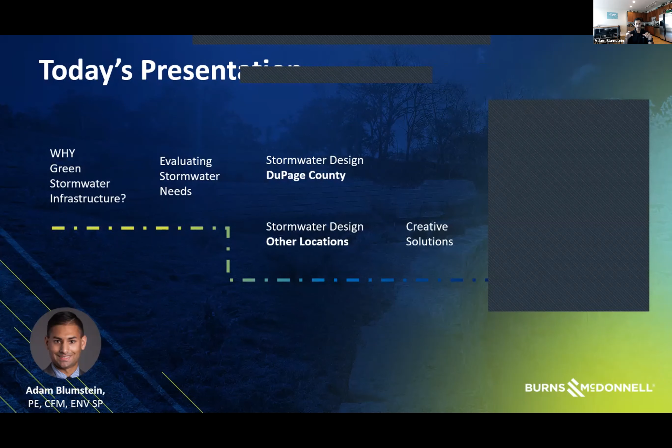So today's presentation includes a little bit of discussion on why green infrastructure is important, and moving along to how do we evaluate some of our stormwater needs and find better ways to evaluate that from what we've been doing in the past. Moving forward a little bit to talking about stormwater design in DuPage County. We don't want to hit too much because we know most of you guys probably know DuPage County better than we do. Then move forward towards stormwater design and talk about some other locations that we've worked on across the country and some of our experience working in different areas and kind of how that compares to DuPage County and what other places are doing.

And then talk a little bit about some creative solutions that we've implemented on different projects and our component-based approach to implement specific stormwater components on these different projects and how they might fit in, and then wrap up and summarize our theme, raising the bar. And we're going to bring that up multiple times. You'll hear us talk about it and reconnect different components of stormwater management and really how we can do better.

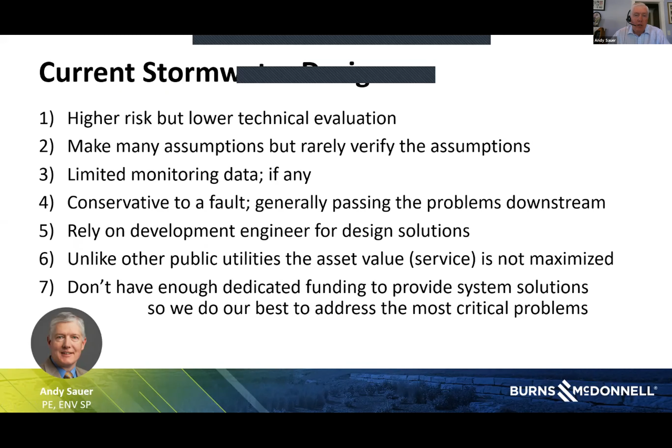And then as we redevelop or develop, a lot of our solutions are done at the development engineer level, and I would argue that sometimes those are smaller projects, but we don't understand the overall impact that those smaller developments have on the overall system. And so sometimes I refer to that as a death by 10,000 cuts. We continue to improve our system upstream with redevelopment and development. We don't understand how that impacts downstream, and so we see problems.

And then unlike other public infrastructure, I would argue that we don't often maximize the current infrastructure we have and get full value out of it. And are there ways that we can do that better in the future? And I would argue there are.

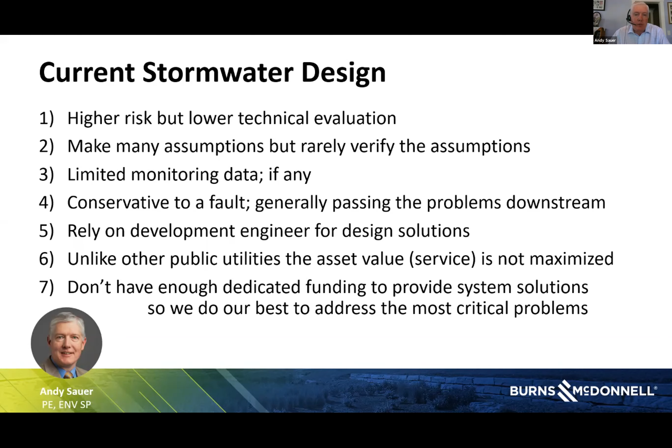And then finally, we all live in this boat, and even the EPA and the federal government are looking at ways that we can get more dedicated funding, because stormwater, as we all know, unfortunately is kind of the last one to the table. And we don't have enough funding to address the issues that we're going to talk about here today. So that's, I know, a big problem. So if we move on, Adam.

So why should we care? Well, we all care because we're on this webinar, obviously, but our number one thing we're doing with stormwater improvements is we're trying to mitigate flooding, right? And so I've looked around the country and looked at different things, and we do projects, and you look back in the future, and we still have all these flooding problems in urban areas.

There's always a storm that we can't manage, and we see this often, and I know every community from DuPage County to Kansas City has these issues. So when we think about this, do we really understand, when we do improvements, what the issues are downstream, and are we truly mitigating flooding as we look throughout the system? So next slide.

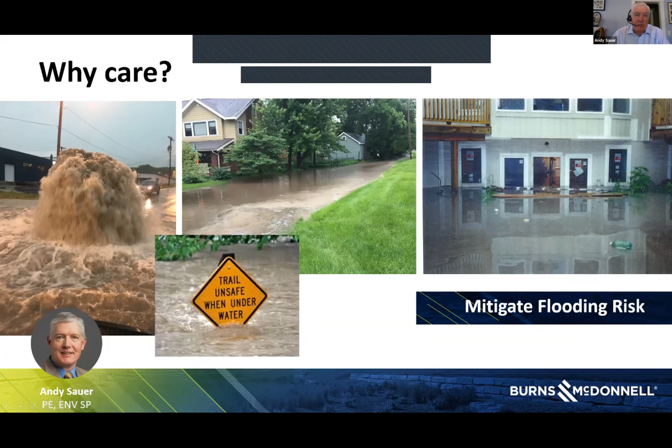I'm going to go through these pictures fairly quickly so we can stay on time. And then this is my biggest one I've looked a lot at in the last few years: when we're doing system improvements upstream, do we think about, especially if we're discharging to natural streams, what are the impacts of that more efficient hydraulic collection system? This picture on the left was something that happened within about 18 months after this large RCP went in, and how devastating that was to the downstream stream.

We see infrastructure such as sanitary sewer systems that were in the bank of a stream now are in the center of the stream, and we see larger infrastructure on the right that now is being undermined by a stream widening. So all these things are things that we need to think about. How can we do better designs to not have this adverse impact downstream?

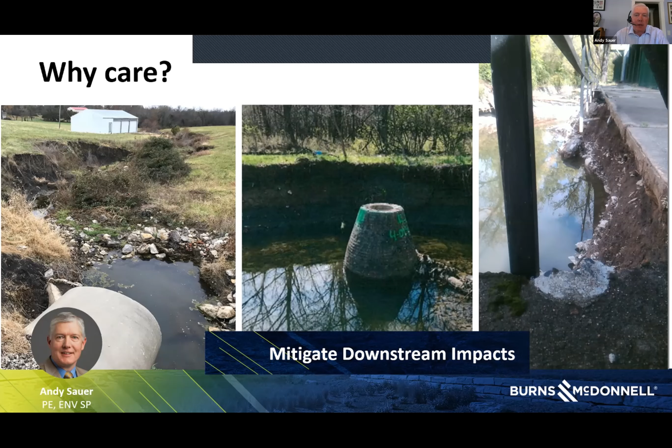We also see this in our road crossings with large culverts being undermined, or wing walls for a recently completed project all of a sudden falling into the stream. Well, that obviously costs us, from cities or municipalities, significant dollars to repair. And we just mentioned that we don't have enough dollars, so can we think about these designs and make them more resilient, so that we're not having these issues right after we've constructed them? So those are all things to think about.

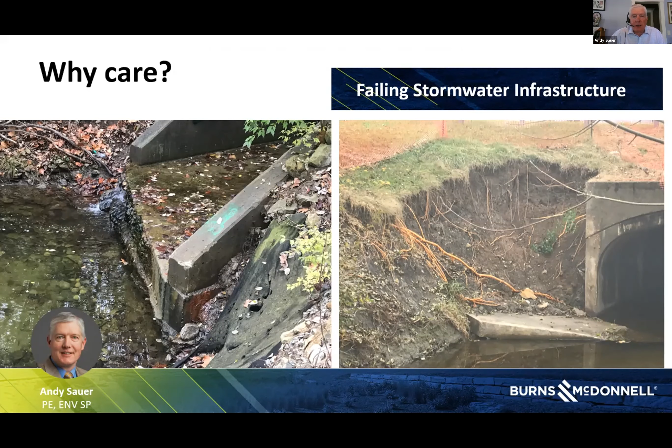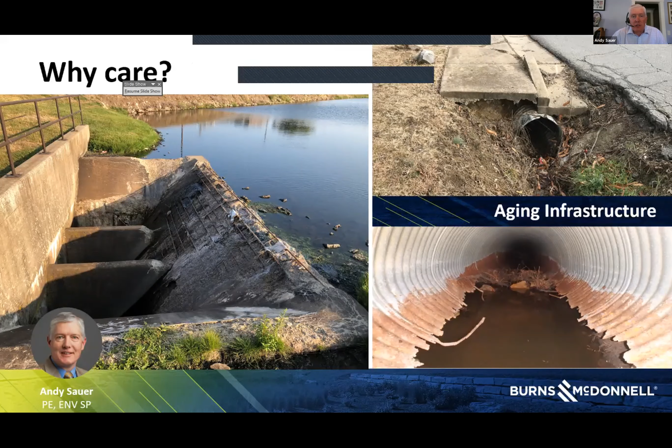And then of course we have the aging infrastructure. The aging infrastructure is a huge problem, obviously, but it's also an opportunity when we're improving these areas. Can we look at these systems a little bit differently, and can we do projects differently so that we're not replacing the aging infrastructure all the time with just larger pipes? Can we manage the stormwater a little bit differently? So can we do better? We have a couple examples we're going to talk about as we move through this presentation.

A lot of times we say, well, we're adding inlets to get more capacity, quote unquote. But what I find a lot of times, we don't look at the actual enclosed system capacity. We just add inlets, and the case on the left, that was done several years ago, and there was no improvement in the street flooding there. What it ended up being is just impacting the pavement more than helping with anything.

And the item on the right was a project that Maddie's going to talk about a little bit more, where this city had some flooding in this public alleyway, and so they went in here and just added this grate inlet. The real problem was they had over 4.5 acres of directly connected impervious area, and the downstream system was an old, antiquated system with no capacity. Adding the grate inlet actually did nothing. They didn't understand the problem, so they weren't able to solve the problem.

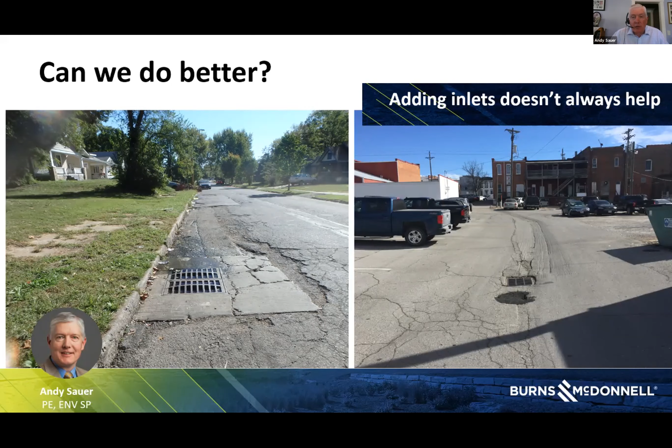And so Maddie will show an example of how we did a little bit different design to help address the problem, rather than just adding an inlet. We looked at what the problem was and then designed a solution to solve the problem.

And these are some of my favorite slides. We do stormwater, but then we try to make sure the stormwater doesn't get in contact with vegetation. I love this. We have a lot of detention basins that have concrete flumes at the bottom of them, so the most frequent water doesn't get to the vegetation. I call them flow in, flow out detention facilities. So I argue, what's the value we're really getting out of these systems? We're mowing them, but we're not doing anything else with them because very little water gets outside of the flume a lot of times.

We do curb setback inlets, and then we also spend money on vegetation and trees right behind the curb inlet, but once again, we don't connect any of those. In this picture on the upper right, we're using an alligator bag to irrigate the tree, trying to keep everything alive, and meanwhile, we have a stormwater inlet, and we're not connecting anything to the vegetation from a stormwater standpoint.

And then my favorite picture is the tree completely surrounded by curbs, and how sustainable is that, right? We're spending money on trees. Many cities and counties have landscaping tree ordinances, and then we're putting them in a concrete prison and thinking, well, I hope that tree lives.

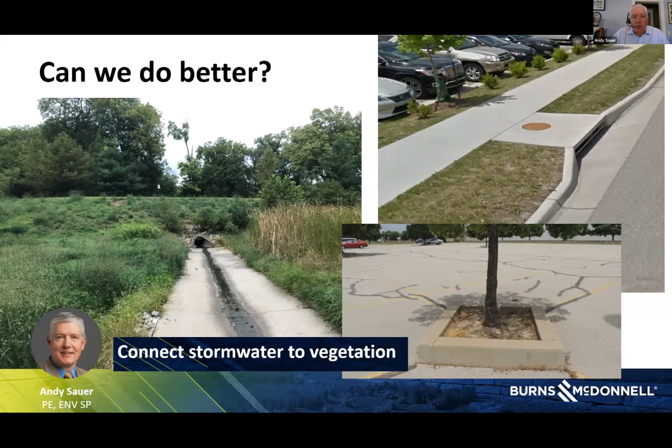I would hate to be that tree. You get what, 18 inches of space to try to live. So these are all things I think, can we do better? And I would argue, yes, we can. And so how does that look?

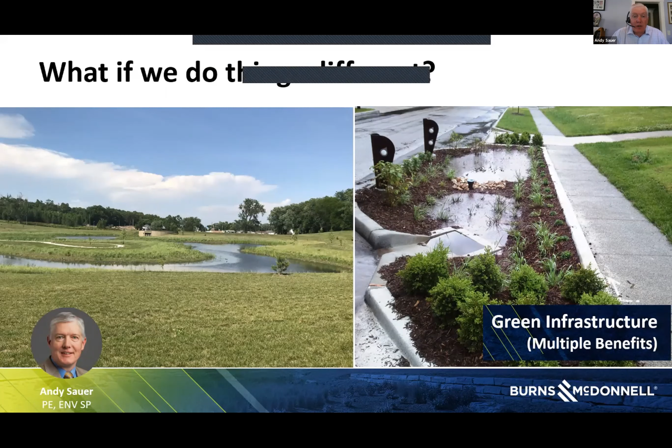Well, we've been doing a lot more with various different cities, looking at ways where we're looking at stormwater as more of a resource, and how can we design and implement projects from as large as the one you see on the left to as small as the one on the right. But we're using that stormwater to maintain a vegetated system that is capturing, controlling, and I think controlling is key, and then conveying stormwater. So we're not just capturing and conveying, we're using green infrastructure or other places to use that water, control it before we're immediately conveying it downstream.

Other things we've been doing is optimizing existing systems or optimizing stormwater function with real-time controls, where once again, we're able to, in an adaptive situation with real-time controls, manage stormwater before and after a rainfall event by using the National Weather Service forecasting, in this case through a company called OptiRTC, where they're able to predict the probability of rain, and then we can lower or open a valve to increase the storage volume in real time, so that we can optimize that facility and get a higher benefit from that stormwater retention.

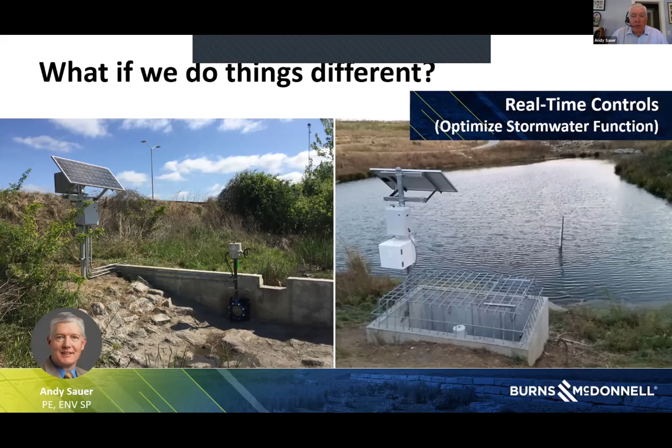And then, of course, in many urban areas, the pervious pavers are a great application where we have large parking lots, where we can do what I refer to a lot of times as more continuous collection. So instead of collecting stormwater at a curb inlet or grate inlet, we're now using this continuous collection idea with pervious pavements, and then storing it temporarily underground in either aggregate storage or plastic crate storage to get that control again before we're then discharging it downstream.

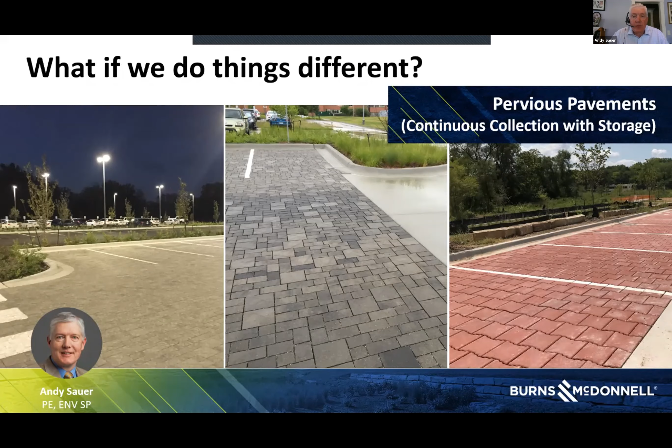And then using more open systems, once again, in open swales, vegetated swales, where we can collect, store, and convey. So all these options we're showing just start to look at what are the multiple benefits that we can get with stormwater, and the solutions start to look, of course, a lot different.

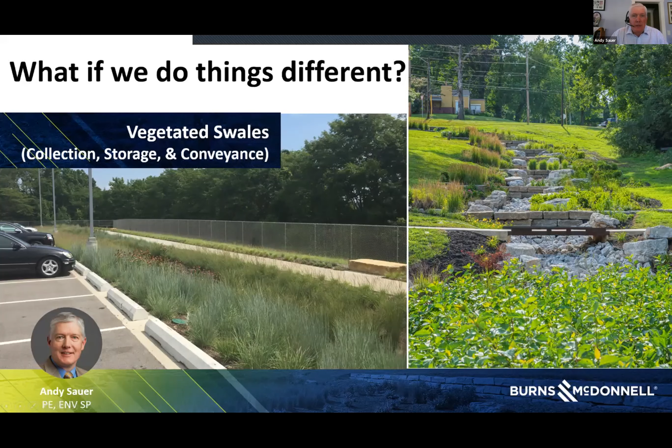So with that, my final introductory slide here is that we'd like to really understand and solve the problems, and then provide that multiple benefit. We want to maximize the limited stormwater dollars we have and to increase the benefit. We want to increase the level of evaluation to reduce all the risk, not just maybe the upstream risk. I think we all have a goal to optimize our current assets, and smart technologies, continuous modeling, optimizing those systems is a way to do that.

And then considering the total cost of stormwater management, and how that impacts downstream assets. So if we're solving a problem upstream and just passing it downstream, there could be significant cost in that solution that we're not necessarily considering. And then finally, I've done a lot of work in the last few years on updating city and county design standards, because if you don't understand the standard you're trying to implement, can you actually even afford to meet the standard you're trying to meet?

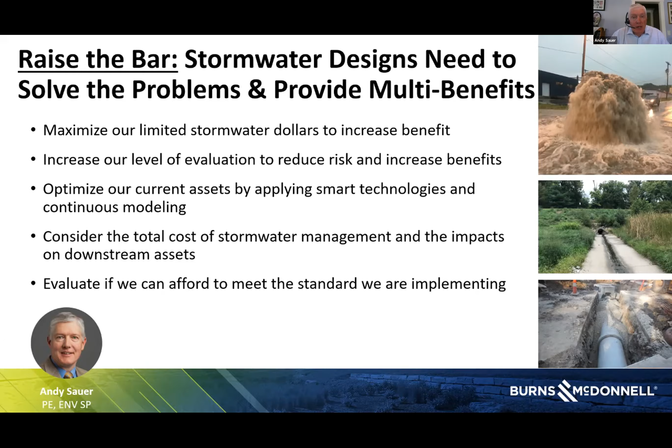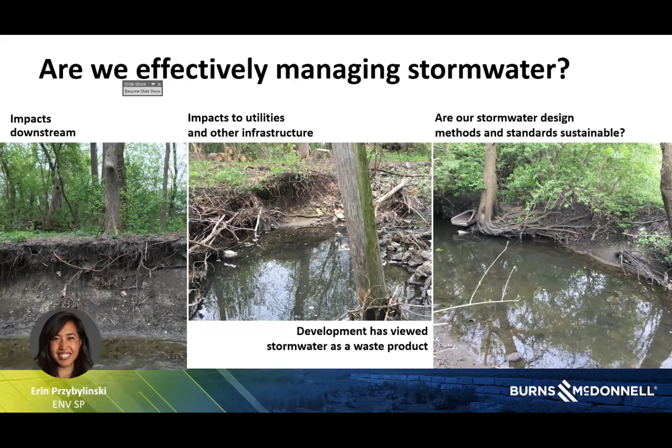Guessing it wasn't originally designed and constructed that way, but without proper management, that water is eventually going to get to where it wants to go, potentially impacting nearby utilities and infrastructure. And finally, can we shift our mindset to view stormwater more as a resource rather than a waste? And the first step to capturing that resource is really asking the question, are our stormwater design methods and standards setting us up for a sustainable design?

So an example of that is how we typically evaluate our designs. And a commonly used method is looking at these discrete events, so just how a single individual event would impact your design. We ask ourselves, can it withstand the 100-year, 24-hour storm? Yes, great, sign and seal it. But we don't really consider how having several smaller events occurring within a short period of time, which is not an uncommon occurrence in this region, how that could impact how our system performs.

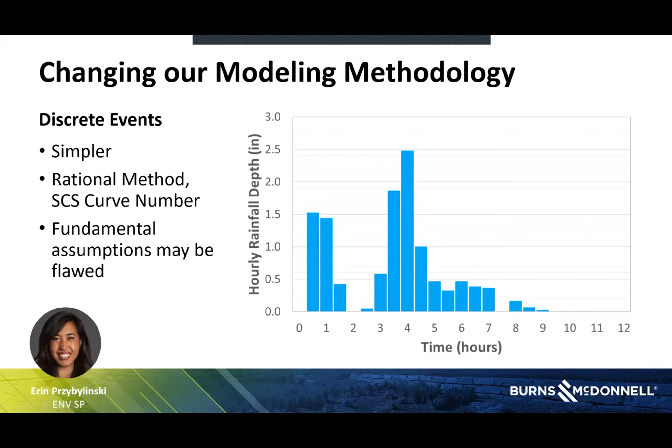On top of that, the rational method is very dependent on certain parameters that can kind of be manipulated to sometimes get the answers you want. And like Andy mentioned earlier, often the modeler needs to make assumptions to fill in those parameters in the first place. And it's always possible that those assumptions could be inaccurate. So a more robust methodology that we can use is continuous simulation. So that's the next slide.

Setting up a series of rainfall events to run through your design to get a more comprehensive perspective of how your system is going to perform over the weeks, the months, the years. You can even consider using historically recorded data from your region if it's available, which would give you even better tailored results. But really getting away from that peak flow analysis can help us better understand the risk of system failure.

Even if we continuously evaluate system performance throughout just the duration of a single storm, we might see that, yeah, it's at capacity during the 10-year, but maybe only for 4 minutes. Is this something we're willing to accept? And you can make a more sophisticated, multifaceted decision rather than a binary, does it cap out or does it not approach, because risk is really more complex than just yes or no. So maybe we should consider shifting away from that lower technical evaluation that Andy mentioned earlier with that higher risk, and more towards higher technical evaluation with a more complex understanding of those risks.

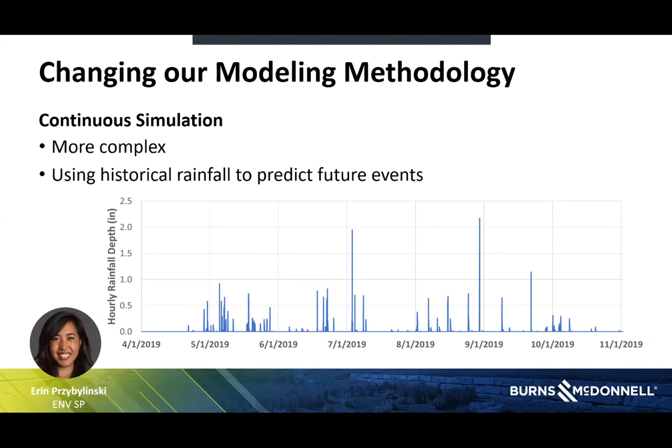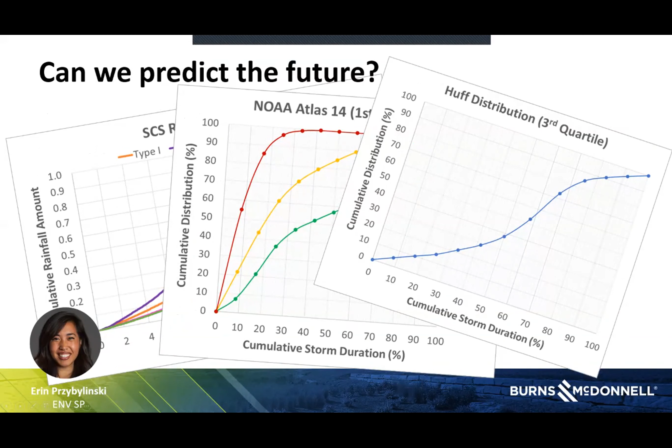And risk really lives in the future tense, right? And we have dozens and dozens of rainfall distributions that have been developed by different agencies. This is on the next slide. And these have been developed using years and years of data that's been collected to try and predict the future rainfall events. But I guess the question is, is basing our designs on these past storms and past data going to set us up for success in the future? For example, did you predict this storm event back in May? And I'll hand it off to Adam to tell us a little bit more about this photo.

But in this particular instance, we had heavy rains in the region, even tornadoes in some areas. There was an earlier rain midweek, I think around the 14th and the 15th of May, which dropped about an inch and a half of rain in the Naperville area. And then another 2 inches of rain fell over the weekend, I think on that Sunday the 17th. In some areas of Chicago it was up to 3.5 inches of rain. So those back-to-back storms, are we considering that?

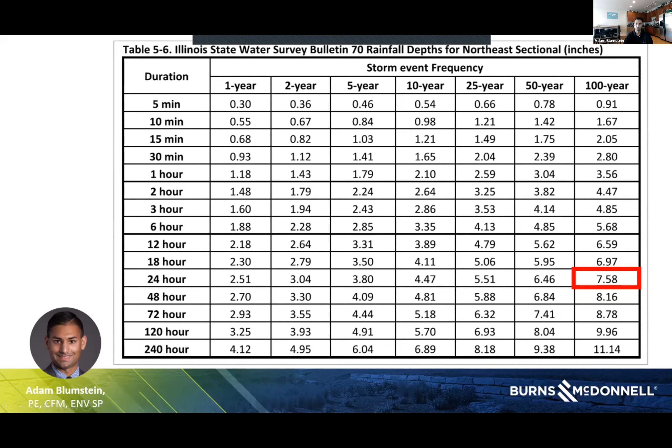So going along with rainfall, I think all of you are familiar with Bulletin 70, and DuPage County now using Bulletin 70, looking at how that's changed over the years. Previous to 2019, when the Bulletin 70 update occurred to the rainfall depths, I've highlighted here about 7.5 inches of rain for the 100-year 24-hour, which is commonly what we use to design our detention basins and major stormwater facilities.

Then you look at what's happening after the update that was made in 2019, and what the majority of communities are now using going forward is almost an inch more of rain for the 100-year 24-hour event. So the climate scientists looked at the past historical rainfall data in the region and extrapolated going forward: what are we going to see? So climate change is something that we all need to think about and design for, and the State Water Survey is trying to take that into account, and I know a lot of communities are doing that as well.

Again, going back to the example of back-to-back events, the one downfall of looking at maybe just this 100-year 24-hour event: are we considering how events back to back could affect our designs? And also even the smaller events, could we be potentially over designing for most of the events, or not even controlling the right amount of water, and maybe for these smaller events we're just letting out too much water as opposed to looking at these larger events.

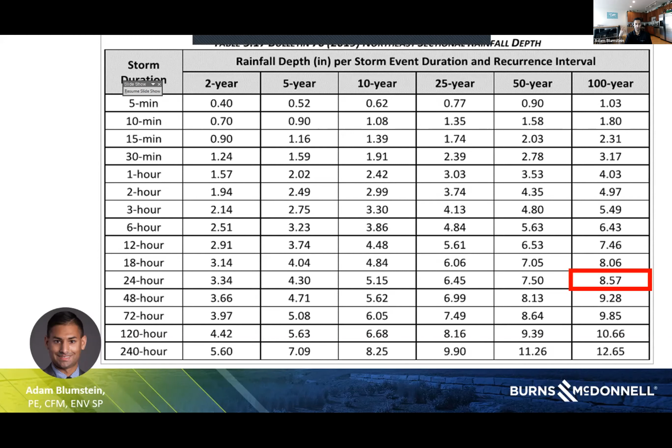So these are things to think about as we're designing, and obviously we have to consider the standards, but as an engineer, you always need to, in the back of your mind, be thinking, what I'm doing, does it make sense, and not just blindly follow.

So moving on, I'm going to touch on this real briefly because obviously the group is familiar with DuPage County, so just touch a little bit on some of the topics related to what we're going to cover further in as we compare it to other communities. So you can see how things may differ in the Northeast Illinois region versus other parts of the country.

If you look at the DuPage County Stormwater Ordinance, two things we wanted to highlight, and there's a lot of areas that we could talk about, but as we look at best management practices, the requirement is if there's 2,500 square feet net new impervious, you have to design for post-construction BMP using a 1.25 inch rainfall event. You could find that in the ordinance. And that's looking at volume and pollution control, and the main component is to encourage infiltration, which is a great thing, and that's one of the ways we talk about raising the bar on stormwater.

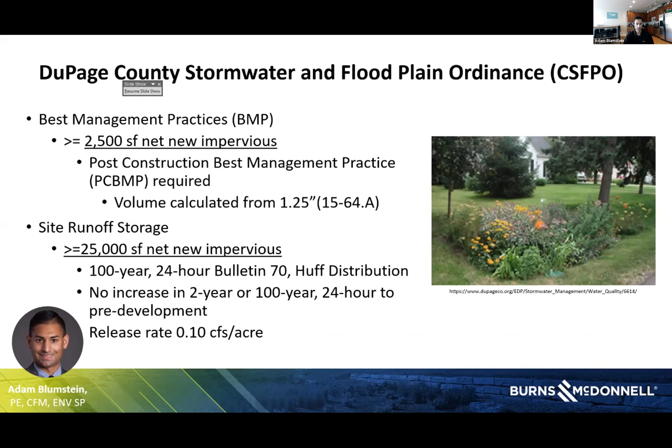Also site runoff storage is another area we look at. We talked a little bit about the 100-year 24-hour, and a little bit about release rates. So again, the ordinance does mention not increasing for the 2-year event as well compared to pre-development, which is a good thing. So again, it's looking at not just one single event, looking at multiple events, and also how smaller events, which could potentially be affecting our system more frequently than these larger events, affect our infrastructure.

As we move on to BMPs, DuPage County has a pretty developed BMP manual. You can reference it through the Stormwater website. DuPage County breaks down their BMPs into 3 categories. Stormwater treatment, which is really looking at quantity and quality, so infiltration and vegetated swales are a few examples of those types of BMPs. Sediment control, so preventing that sediment from getting into the water bodies. That could be your typical silt fence, sediment traps, those types of things.

And then pollution prevention, which is more of a maintenance and operations approach, looking at how you can prevent by doing street sweeping, spill prevention control, and other measures to prevent longer term pollution into our waterways. And really it comes down to, if you look at this table, which is also taken from that BMP manual, really minimizing our impervious surface. So raising the bar, by implementing more infiltration and green type solutions, we can prevent a lot of the impact that we would potentially have on our waterways.

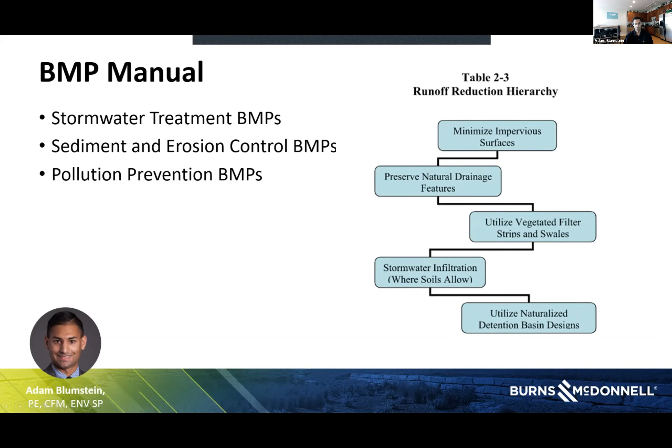So now I'm going to pass it to Maddie. She's going to talk a little bit more about what some other communities are doing that we've worked with. Yeah, so Adam gave some great examples locally there. I'm coming at you with some ideas from what other communities are doing.

Also a perk of, I guess, COVID is that we can see what other communities are doing much easier via these online webinars. A lot of the examples I'm going to give today are more of that central Midwest, that Nebraska, Missouri, Kansas kind of region. And Andy and I are both from our Kansas City office, so we have a lot of KC Metro references here to share with you guys today.

One of those being that the KC Metro area has had and currently has some regional stormwater standards. So Adam presented some of the DuPage County requirements for BMPs. We also have a BMP manual here in the Metro, where we're looking at more of that 1.37 inch range. When we're talking about some of our other local communities that also need to meet CSO compliance, that water quality storm is very similar to some of the target combined sewer compliance storms that these communities are looking at as well.

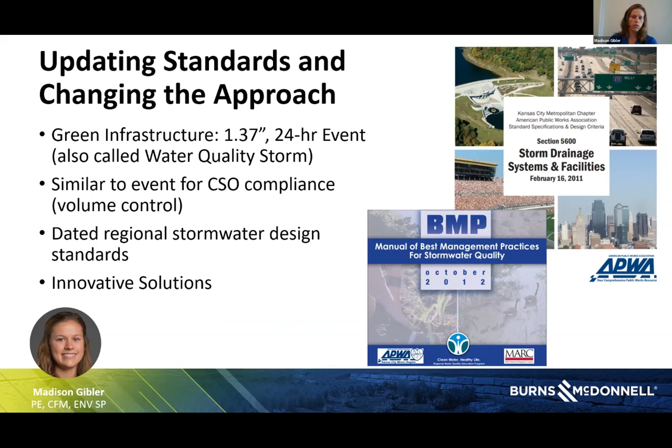However, unlike the DuPage County area and the Chicago Metro, you guys have updated your requirements here pretty recently. Some of the regional criteria that we have in the KC Metro area is getting pretty dated, kind of in the 2011-2012 range. And in those standards, some of the requirements preclude some of those more innovative, sustainable solutions. So we're going to talk through how some of the communities are branching away from the norm and trying to provide a more comprehensive benefit to their area, to their community.

So the first approach here is more of a watershed approach, where this community is looking at their jurisdiction on a smaller watershed basis. So this example here is a watershed that's highly developed and is pretty primed for redevelopment in the next 10 to 20 years.

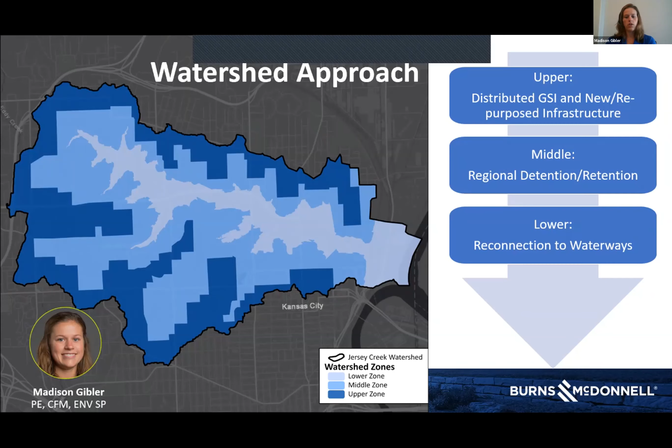So looking at breaking this watershed down into different topographic regions, an upper region, a middle region, and a lower region, each with varying stormwater management objectives, where they're looking more to use distributed green infrastructure to collect and store stormwater where it falls in the upper zone, trying to identify some more regional detention or retention opportunities in the middle zone. And then as they get to the lower zone there's a natural, well, it's not natural anymore, but a stream or a creek that runs through the center of this watershed, and looking to reconnect the system to that stream.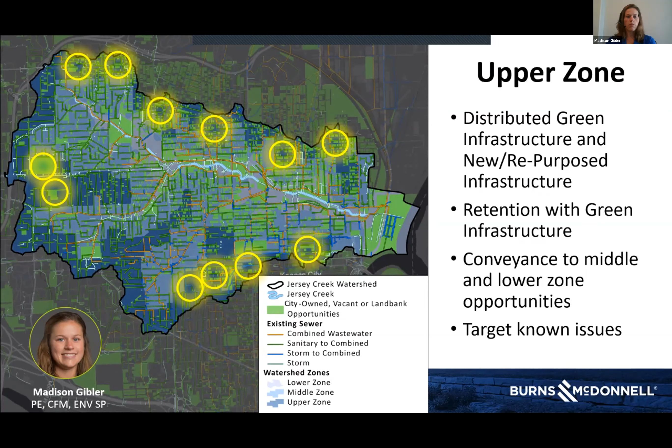So breaking it down by zone, the first is our upper zone here. So this is kind of those first couple of blocks. I mentioned this is an area primed for looking to collect stormwater, pretty much where it falls or in the first few segments of that minor collection system. By using green infrastructure, you not only get a detention-based benefit for those smaller events, you also get some retention. So we're removing some of the stormwater before the system and helping those downstream properties see less runoff. Also in this area is where you start to build out the connections to your middle zone and an opportunity to target some of those known drainage issues.

In the middle zone here, this is where stormwater is starting to aggregate. So you're getting 10 to 20 to 30 acres of drainage area. This is a great opportunity to identify some of those more regional facilities. Oftentimes there are opportunities to piggyback on different pocket parks or even larger park spaces where you can have a stormwater benefit and also be used as a public amenity. These can be designed to create those connections from your upper community before you get down into the lower zone. So they act as more control points to help protect those larger event drainage susceptible community members downstream.

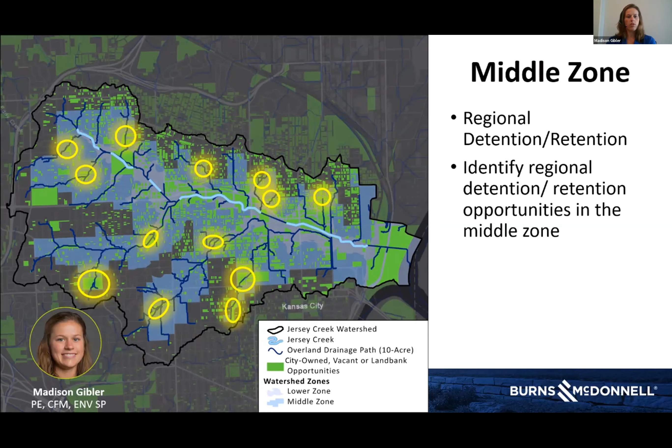And lastly, in the lower zone, this is again where we're starting to look at reconnecting to our existing waterways. We need to look at maintaining some more of those overland drainage paths. It's at this point in the system where these properties are more susceptible to more widespread or larger flooding issues. Now we're talking about potentially hundreds of acres of drainage area where, when the system's at capacity for a larger event, the water is going to go here anyway. So how can we get it down to the creek or the stream or that receiving water body without harming our neighbors?

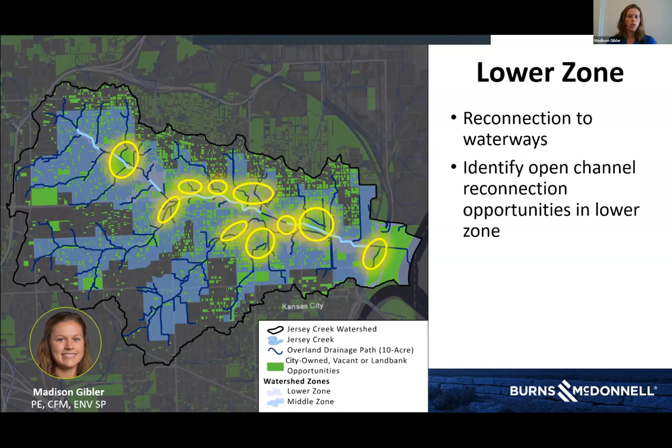So this example here kind of lays all three pieces together. This is looking at a sub-basin within that watershed example I presented previously. So up in the upper part of the watershed, looking at a more minor stormwater collection system to bring water to some of those smaller green infrastructure facilities, which are then upstream of a regional detention opportunity, capitalizing on an existing park space to enhance a wet detention area. That wet detention facility then acts as a control point before discharging stormwater to the lower system.

This sub-basin example has a lot of drainage issues in that lower portion there that's circled in yellow. So this area I mentioned is prime for redevelopment. This area here along that overland drainage path has a lot of parcel vacancies that happen to coincide with the surface stormwater conveyance. So by preserving and reconnecting those overland drainage paths to the receiving stream, this community has an opportunity to create a community amenity, whether it be a trail system, but also to protect those new development sites and that redevelopment so that the future developers and community members and property owners don't repeat the same issues that happened 20, 30, 40 years ago, why those people left that area.

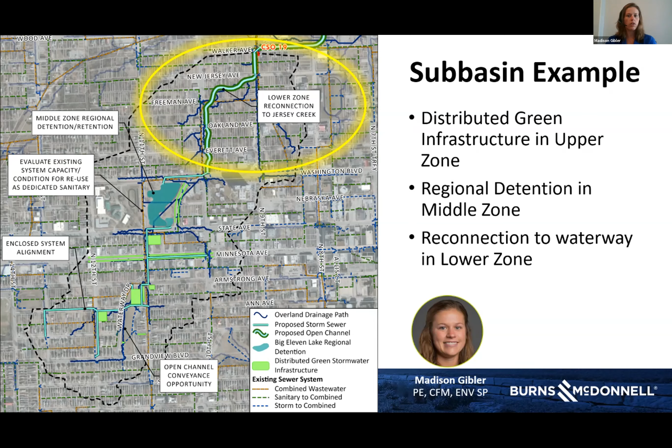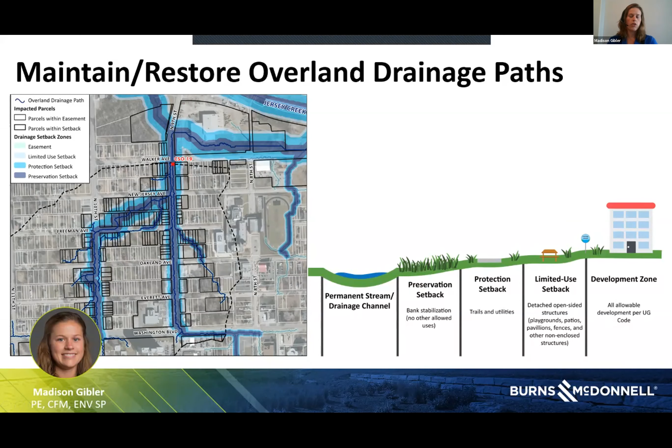This slide further emphasizes that importance of preserving those overland drainage paths. So that area circled in yellow on the slide before, this is a zoomed in view of that, along with breaking down this idea of preserving or maintaining overland drainage paths, similar to a stream buffer policy, I guess you could say, but more from the perspective of protecting those property owners so that we're not allowing people to put their homes, their businesses, their decks in the way of where stormwater is going to go when the system is exceeded, right? There's always going to be some event where we're not able to mitigate that flooding risk. And so to layer on that protection, we need to look at preserving those overland drainage paths for conveyance when that system is exceeded.

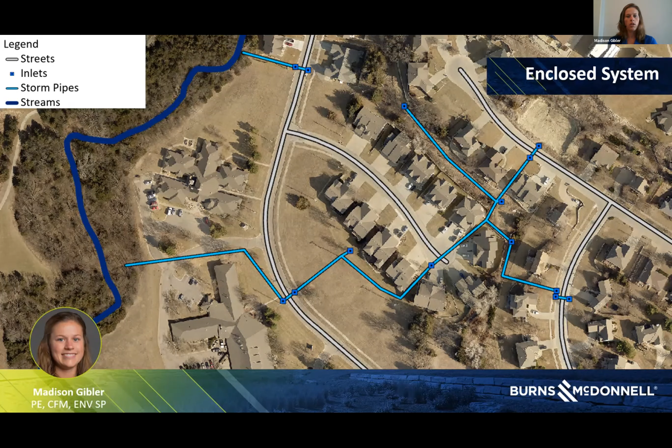So here's an example in another, this is a smaller community more in central Kansas. So instead of looking at redevelopment, this is a new development example. These homes were built circa 2014, 2015. The dark blue line on the left side of your screen is a natural channel system. It's an open channel, it's a stream. And you can see this neighborhood here to the right has a stormwater collection system, which then discharges to that stream.

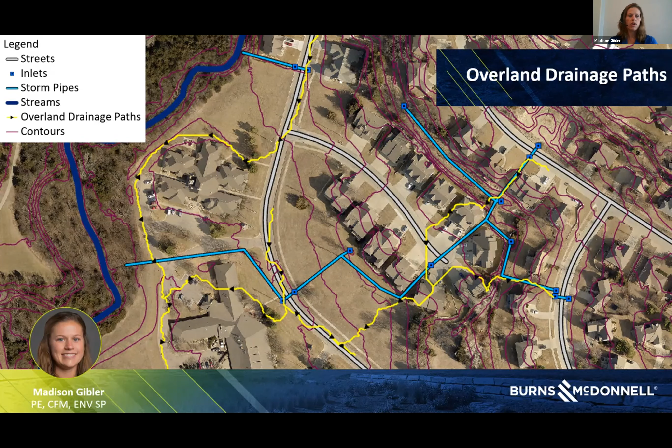From here, we overlay on the contours and derive where the overland drainage paths are going to be. So when that stormwater system is at capacity, it can no longer take any more. This is where stormwater is going to go. It's going to follow those yellow lines. So you can see that when that system capacity is exceeded, these are the homes that are more susceptible. So you've got the overland drainage path that's running through a couple of houses there. These are the homeowners that are more susceptible to those drainage issues.

And as you get closer to the stream there, that's a retirement facility, so an even higher risk of people having those drainage issues. So by understanding where stormwater flows when, not if, that enclosed system capacity is exceeded, that's how we can raise the bar on our stormwater design. We can plan our development accordingly to protect our people and our property.

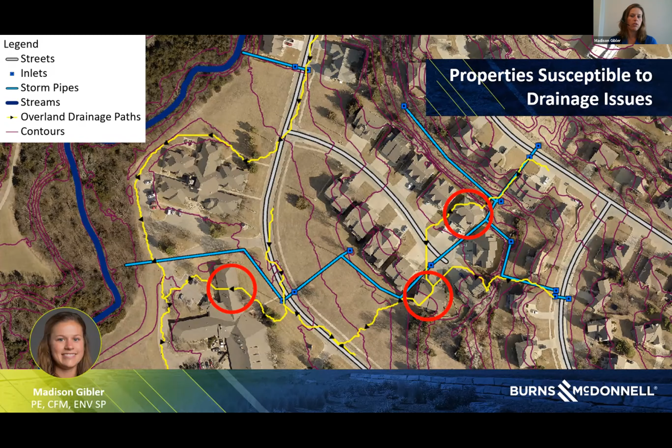This weir structure was retrofitted with an actuated valve, allowing the facility to manage those smaller events more effectively. So this retrofit was targeted to manage those smaller storm events. However, the past few years of data is showing that 88% of storm events are being controlled. And some of those are much larger than the 1.5-ish inch storm event that we would look to controlling for those smaller storm events. So using these real-time controls in lieu of passive control structures can help us more effectively manage our stormwater across a range of events.

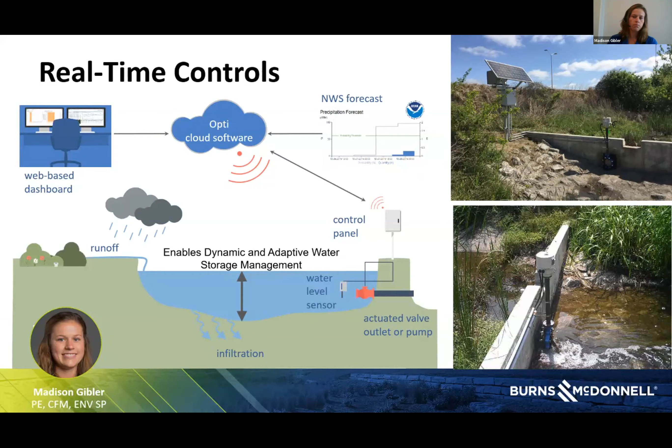And yet another community in the metro area is looking at ways to standardize their green infrastructure design without hindering some of that flexibility that is so important to these innovative, sustainable solutions. They'd seen some problems or issues, or an opportunity to improve in terms of construction and design reproducibility.

So standardizing a design approach to not only streamline their review process, but to also get some consistent terminology for contractors that are trying to build this green infrastructure, which again has become more popular in the last 10, 15, 20 years, obviously much newer than the typical pipe and gray infrastructure that a lot of contractors are more accustomed to building.

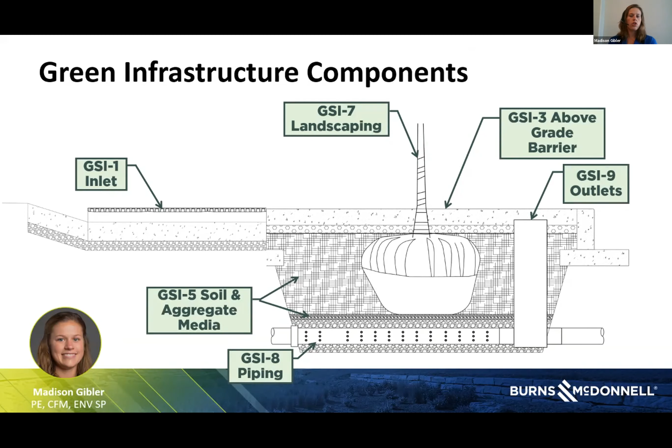So that standardization of the terminology is very helpful in getting a consistent stormwater management project that functions and meets all of those objectives. So these green infrastructure components, you can see on a small distributed scale here, they act as building blocks, so they can be scaled up from a small stormwater tree planter all the way to a larger wet basin.

So this information, this community has detailed it in a green infrastructure manual. This is an example from Kansas City, Missouri, where they've elected to organize those components or those building blocks in different sections. And each of those sections include tools such as checklists and pre-approved planting palettes

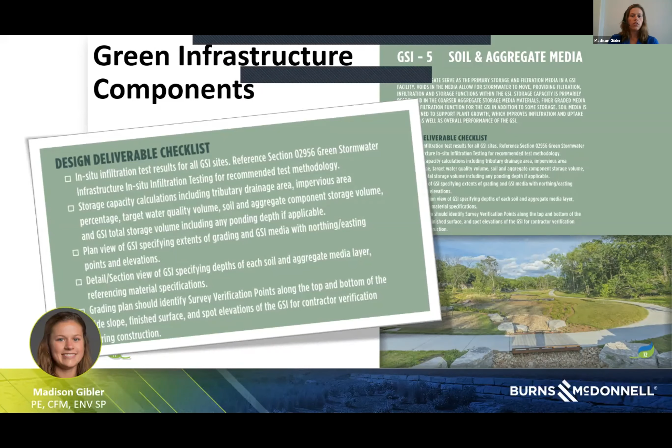to help give some guidance to those designers to have kind of unique pieces to the different green infrastructure solutions, but again, to kind of standardize what we're seeing not only on a review side of things, but also so that the contractor can learn to easily put these pieces together.

So when you go and open each component section, this example here happens to be the soil and aggregate media component. The guidance provides some locations on where these materials are most commonly used, different considerations for the designer, such as assumptions to make.

Aaron talked about the importance of assumptions and how some of those assumptions greatly impact your hydrologic components. Well, we also have the same thing on the performance of our green infrastructure facilities. So to get some standardized approaches on materials so that you're not selecting design parameters just to get the results you want, this manual provides some guidance there.

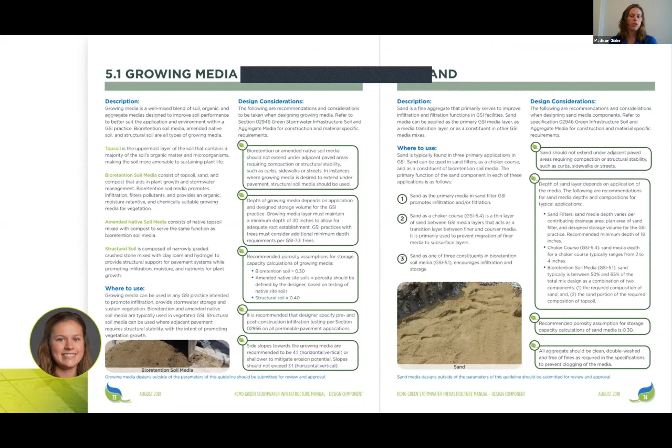And yet another community in the more central Midwest area, these are some examples throughout the Midwest. We've got some up here in the KC metro area as well as Omaha. They're monitoring their green infrastructure so they can have a better understanding of how their systems are performing. So an example, the city of Omaha, Nebraska is using that monitoring data to educate their operations.

The city has elected to install valves on their underdrains, and based on the results of their monitoring, they're deciding how far open that valve should be. If the system's performing better than anticipated, that valve might be all the way closed so that you're getting almost full retention at that point from your downstream system.

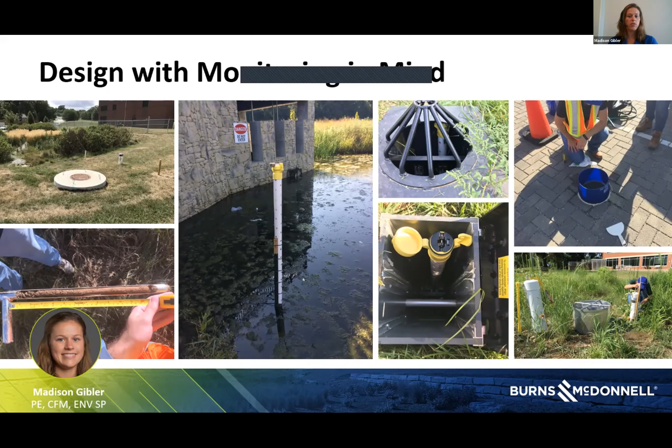So designing your green infrastructure with those monitoring points is important. If you've got the forethought of installing, let's say, monitoring wells, you can often save time and money on the back end and labor to retroactively try to install a post-construction monitoring well, oftentimes running the risk of damaging your infrastructure, or save on repeat mobilizations to do some sporadic monitoring.

The monitoring also provides important information on maintenance. So when we're talking about gray infrastructure, we need to maintain that system to prevent clogging and blockages so that our system capacity isn't exceeded, whether we're looking at street sweeping or routine inlet cleaning.

Well, for green infrastructure, that's very important too, especially in the first 1 to 3 years when the facility is becoming more established. So by monitoring this infrastructure, you can get a better understanding of how frequently it needs to be cleaned. So by monitoring our green infrastructure and our stormwater infrastructure in general, we can fix a problem before it becomes a bigger problem that results in a large design change and a repeat project.

So a couple of examples here. Kansas City, Missouri has constructed some larger green infrastructure facilities. This first example here, Arleta Park. This was a green infrastructure project constructed to meet combined sewer goals. However, it also has a bunch of additional benefits.

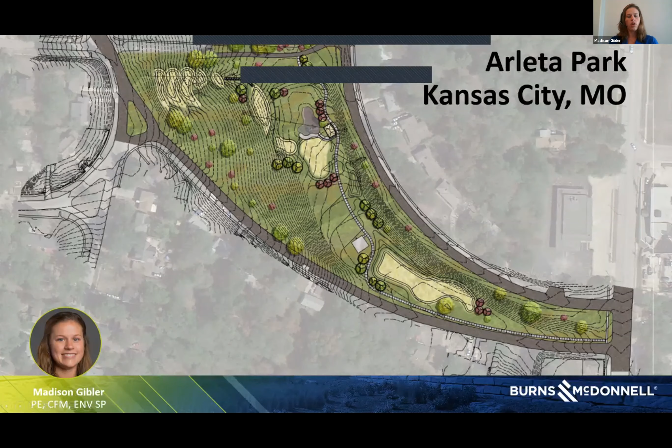This next example is again a green infrastructure facility with a stormwater management and combined sewer overflow reduction primary objective. However, this facility capitalized on some dead space that was in a residential neighborhood. The area was primarily used for dumping waste. And so this project turned essentially a vacant parcel that didn't serve much of a community purpose to a more park-like amenity with some walking trails, some landscaping. It actually provides community connectivity between the neighborhood and a bus stop there.

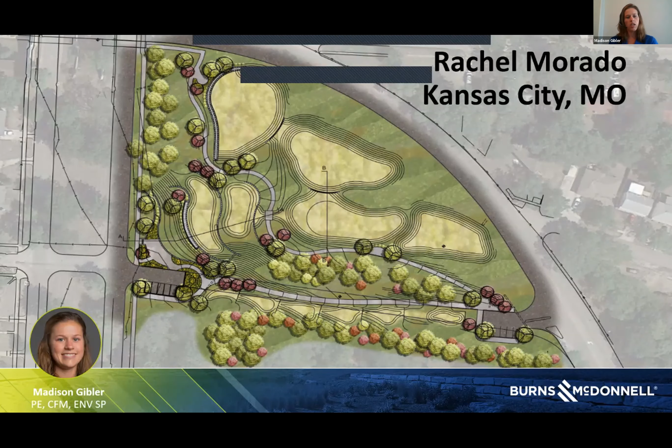So Andy alluded to this when he was giving us the rundown. Do you remember this example? This was the alleyway that received approximately 4 acres of directly connected impervious area. They saw some localized flooding issues, pretty significant ones, in the alley and said, okay, let's add an inlet. Well, when that inlet didn't fix anything and they further looked and saw that there was a downstream pipe capacity issue, fixing that capacity issue is going to carry about a $500,000 price tag. And then how far downstream do you chase that capacity issue? Are we just pushing it to another bottleneck?

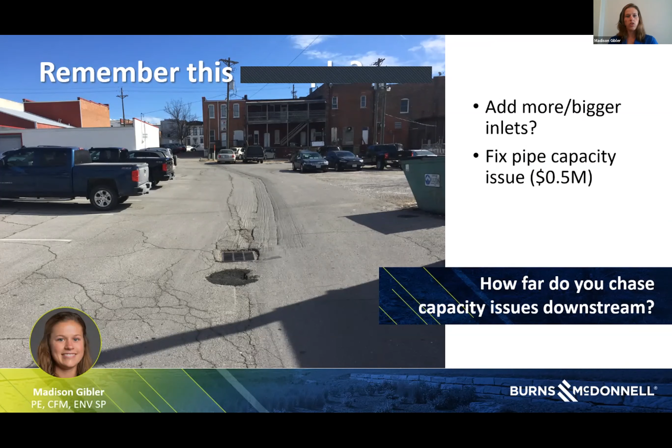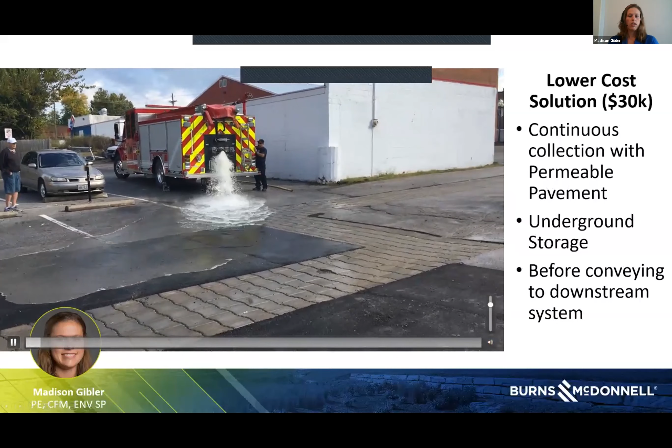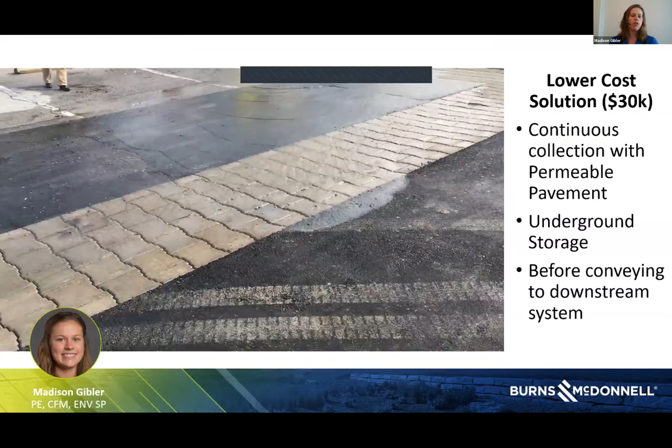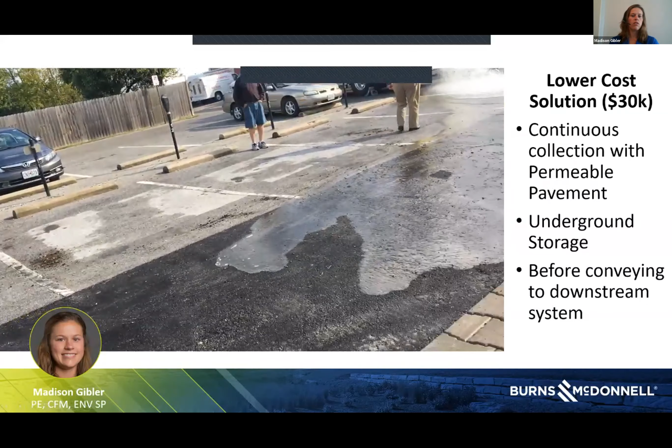So in lieu of that pipe upsize change, a more innovative approach was taken. This was a lower cost solution. So the improvement you're looking at here uses permeable pavement as a continuous collection system. From there, the stormwater, or in this case, the example stormwater from the fire truck, is stored in an underground storage facility. This is a plastic crate system that Andy alluded to, as opposed to a granular subbase. From there, the water is stored before it's conveyed to the downstream system. This community was able to save money and still improve their system without harming the downstream system.

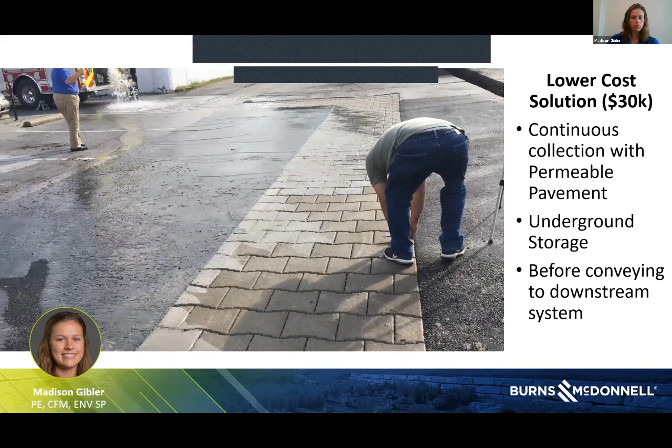Passing it back off to Andy. Thanks, Maddie. I think we're getting into our time here, so I'll wrap it up.

Hopefully you heard some of our bigger messages we wanted to bring today of truly thinking about all the risks when you think about your stormwater designs that you're going to do in the future. Consider a range of storms. Historical rainfall events, look at how those systems might work under various conditions. We encourage and support the increase in level of evaluation of how you do those designs. Continuous simulation models are a big piece of that, and as computers and data become more and more available, I think we should continue to strive to use those.

Evaluate all possible solutions. That's one thing we hopefully gave you some ideas of, just thinking outside the box. What are different ideas that you could do? Maybe not just doing the typical project you've done in the past, but I guess to challenge everyone to think differently. Maybe there's some different solutions that really do provide a multiple benefit and increase that value to your overall community.

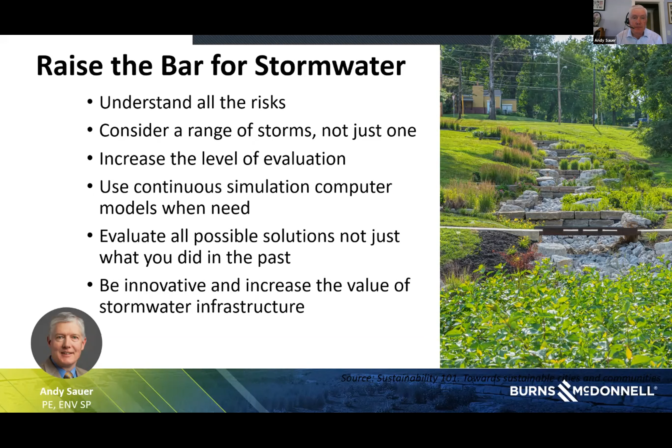And then we'll conclude with just some takeaways. Know your system. You have to start somewhere, identify those risks. I think it's important to just do an honest look at your projects and say, what are our total risks, not only at the project site, but downstream? And then define those objectives of what you want and what problems you want to solve, and then what available budget you have for that, and at least create solutions that address the problems, don't create more problems.

Stormwater issues, as we all live in this world right now and work in this area, unfortunately are not going away. Aging infrastructure, urban growth, water quality, weather changes, we all have our challenges ahead of us. So I think we need to evaluate new tools and approaches to address those. And finally, I'll just conclude with my bottom line. If you take anything away today, my bottom line is if you want your stormwater solutions to provide multiple benefit, you need to start designing and implementing it differently. So that's kind of our biggest takeaway, our bottom line.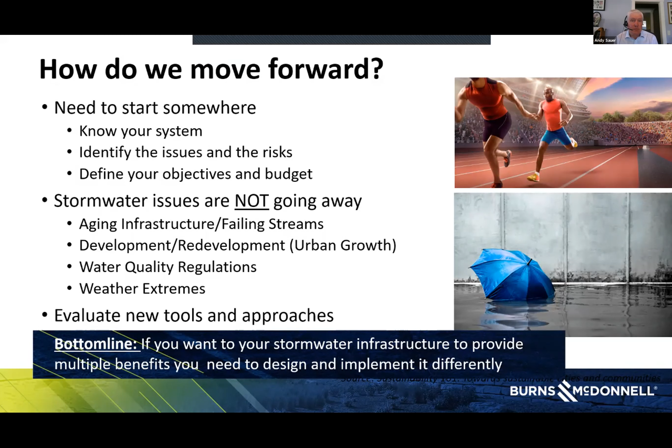So I'll talk through a question we had here in the chat today from Jamie Locke. Jamie had a question about overflow drainage paths. In urban areas that are already developed, where are those paths proposed? And if they're not on publicly owned property, what strategies should we use or are we using to get property owners to cooperate?

Andy, would you like to take that question, or I can jump in too if your voice is tired from two slides? No, it's a great question.

I think what we're proposing is trying to think about stormwater design standards and trying to divide those into different buckets. And one of those buckets is, can we look at where the water wants to go and where those overland flow paths are? So obviously we're using GIS tools to identify those, but then the next step is working with those property owners, which isn't, I know, easy.

One positive example we can provide, there was a smaller community south of Kansas City, Grandview, Missouri, where we were looking at some solutions that were going to be pretty costly. And instead, we looked at where the overland flow path was going, and then the city actually worked with a few property owners to come up with a different solution, which did involve the potential of them having to buy a couple homes, but it actually turned out to be more of a community benefit because those property owners did not want to live in a flooding situation.